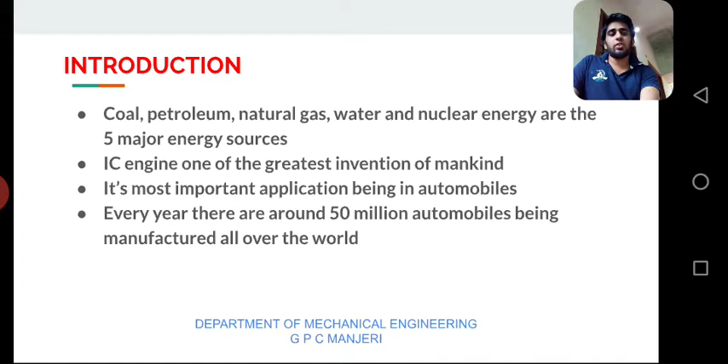With the rise in the number of automobiles is also a rise in the use of fossil fuels. That also leads to some problems. The combustion products of fossil fuels cause environmental problems like air pollution, smoke, etc. Overuse of fossil fuels also leads to an energy crisis.

There is a need of alternative source of energy. Then we discuss about alternative sources of energy.

Electricity is a versatile form of energy, but its drawback is that the storage of electricity is very difficult.

Then we think about another source of energy. We can say magnetism shows as a bright spot in our current scenario. Magnetism is a phenomenon which exists in our nature.

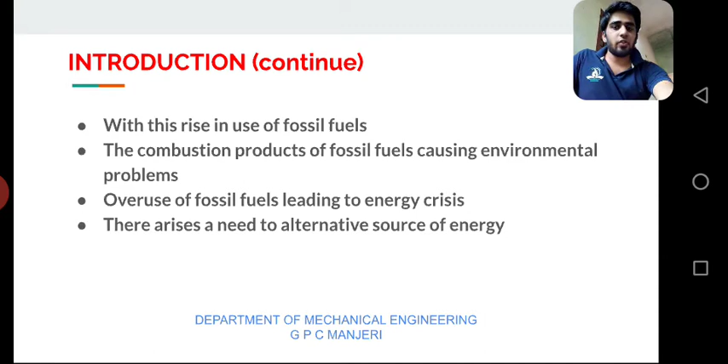Various research across the world have proved magnetic power can be used in our everyday life.

The magnetic repulsion piston engine is an alternative of IC engine. The engine works on the repulsion principle of magnet. The engine is also similar in construction to the typical IC engine.

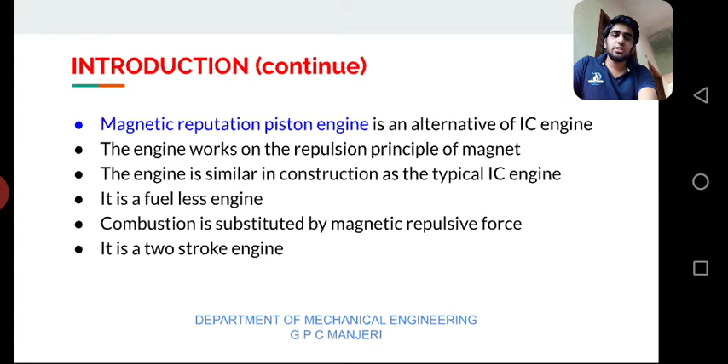It's a fuel-less engine. Combustion is substituted by magnetic repulsive force. It is a two-stroke engine.

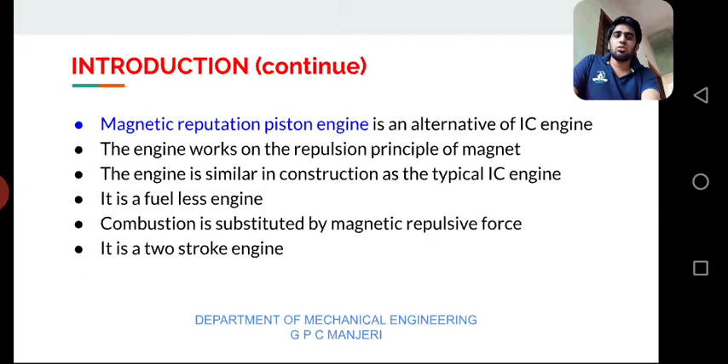Then we discuss about what is the need of this technology. We know that today fossil fuels are widely used as a source of energy in various different fields like power plants, internal and external combustion engines, as a heat source in manufacturing industry, etc.

One of the major fields which fossil fuels are used is the IC engine. Magnetic repulsion engine is an alternative of IC engine.

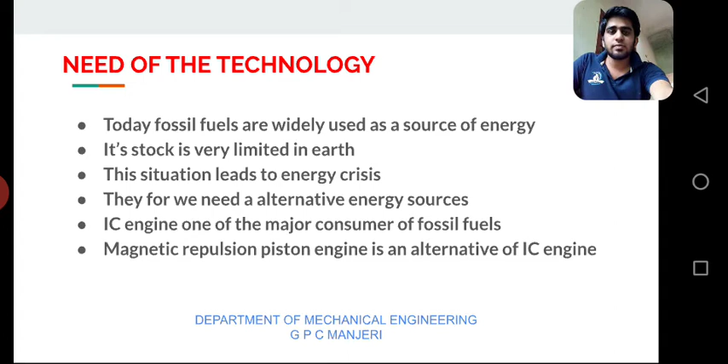Then we discuss about magnetism. Magnetism is a natural phenomenon. A magnet has two poles, north and south.

Magnets repel and attract another magnet. Like poles of magnets repel and unlike poles attract. Magnets are also classified into two: permanent magnet and electromagnet.

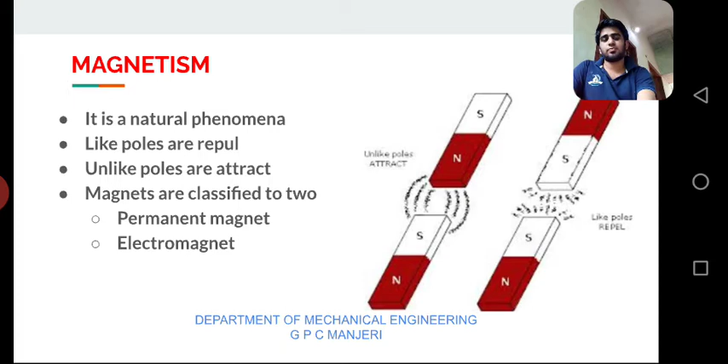Permanent magnet is the most common type of magnet known and interacted with in our daily lives. These magnets are permanent in the sense that once they have been magnetized, they retain a certain degree of magnetism. Permanent magnets are generally made of ferromagnetic materials; iron, cobalt, nickel, and its alloys are also ferromagnetic materials.

Such material consists of atoms and molecules that each have a magnetic field and position, and reinforce each other.

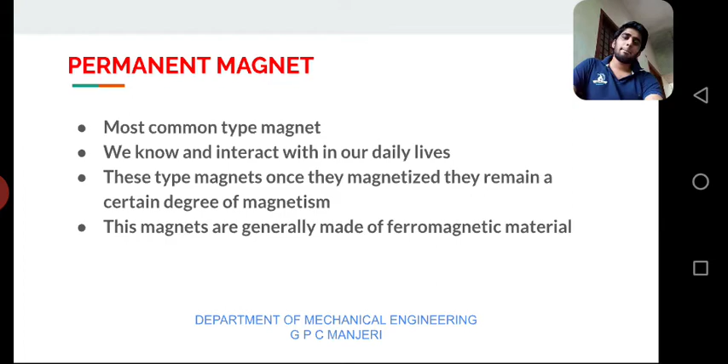Permanent magnets can be classified into four based on their composition. First, neodymium iron boron magnets, also known as NDFEB or NIB magnets. Second, samarium cobalt magnets or SMCO magnet. Third, alnico magnets, and fourth, ceramic or ferrite magnet.

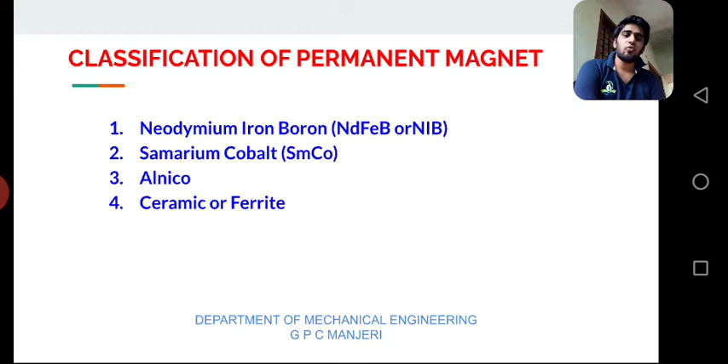Then we can discuss about neodymium iron boron (NDFEB) and SMCO magnets. This type of magnet is the strongest type of magnet, meaning they are very difficult to demagnetize, and they are also known as rare earth magnets since their compounds come from rare earth of lanthanide, the rare earth or lanthanide series of elements in the periodic table. The 1970s and 80s saw the development of these magnets.

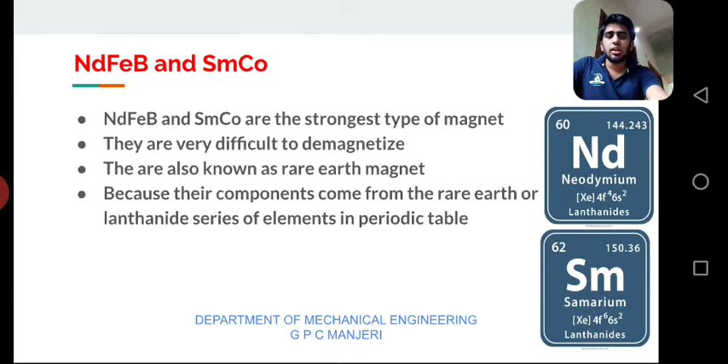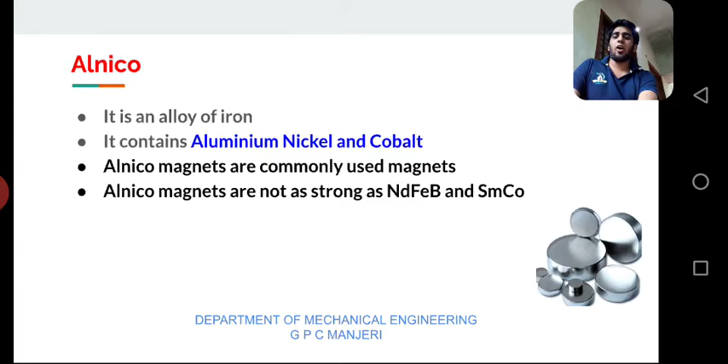Then we can discuss alnico. Alnico is the most common type of magnet. Alnico is an alloy of iron that consists of aluminum, nickel, and cobalt. Alnico magnets are not as strong as NIB and SMCO and can be easily demagnetized. The magnet is, however, least affected by temperature.

Then next, ferrite magnets. Ferrite magnets are the most popular today. They were first developed in the 1960s. These are fairly strong magnets, but their magnetic strength varies greatly with variation in temperature.

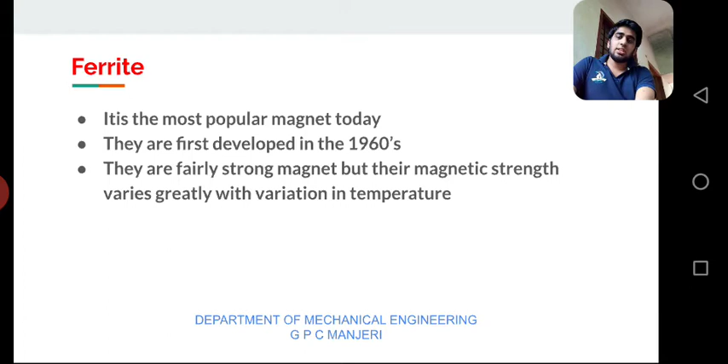Then we can discuss about electromagnet. Electromagnet is a type of magnet which possesses the ability to magnetize and demagnetize as and when required. This control is established by an electric current. When current flows, magnetism is expressed, and it vanishes when there is no flow of current because it is a temporary magnet.

When a wire is closely wound around a cylindrical object, the side faces of the core exert certain poles when current is passed. Reversal of current changes the magnetic poles across the iron core.

When electric current passes around the core, there is an energy generation called magnetic flux. This flux is responsible for exerting the magnetic force.

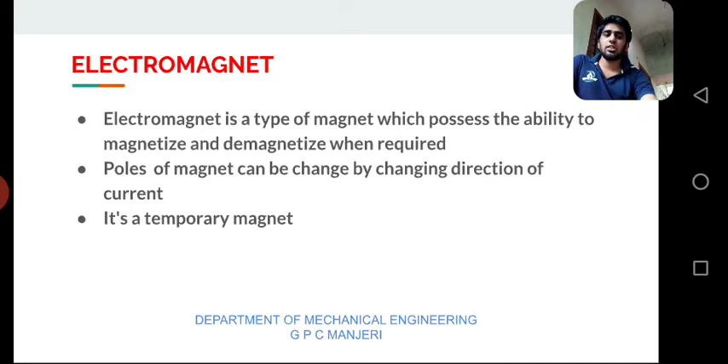Then we can discuss the construction of the magnetic repulsion piston engine. A magnetic repulsion piston engine consists of a non-magnetic cylinder, piston with connecting rod, flywheel and crankshaft, and a pair of permanent magnets.

The construction of the magnetic repulsion piston engine is similar to a typical IC engine, but the spark plug and valves at the cylinder head are replaced by a permanent magnet, and another permanent magnet is placed at the top of the piston which can freely reciprocate along the cylinder. Both magnets are arranged so that the surfaces face each other with like poles. Small openings are provided at the cylinder for air circulation.

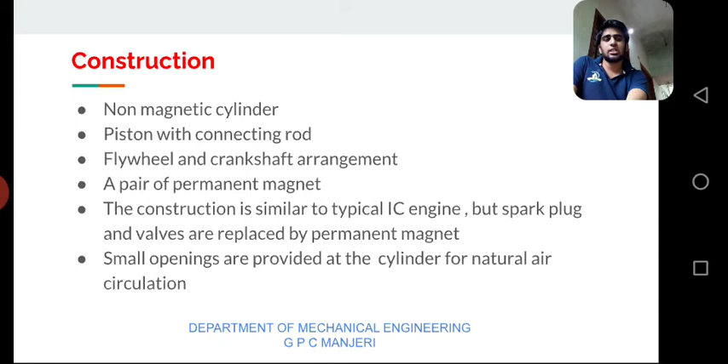Now we can see a picture of the magnetic repulsion piston engine. In this figure we can see the flywheel, permanent magnets, crankshaft, piston, connecting rod, etc.

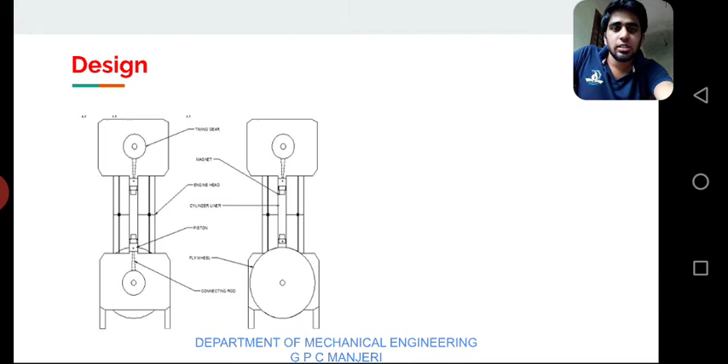Then we can discuss the working of the magnetic repulsion piston engine. As the name suggests, it works on the principle of magnetic repulsion force. When the piston is at BDC, we provide an initial crank effect, then the crankshaft rotates 180 degrees and the piston moves from BDC to TDC.

Then the magnets on the cylinder head repel the magnets on the piston, and the piston moves from TDC to BDC. The crankshaft completes its rotation. After the piston reaches BDC, the flywheel will pull the piston back to TDC and repeat the cycle.

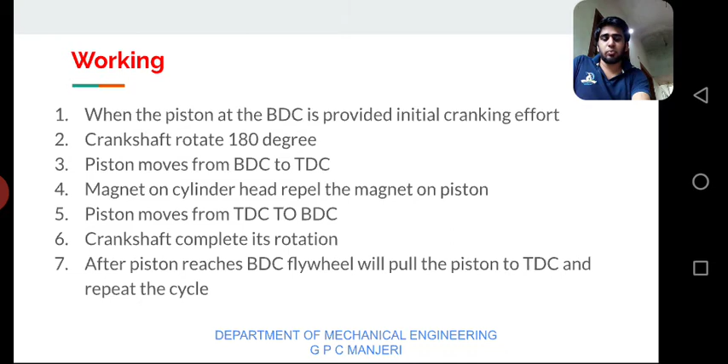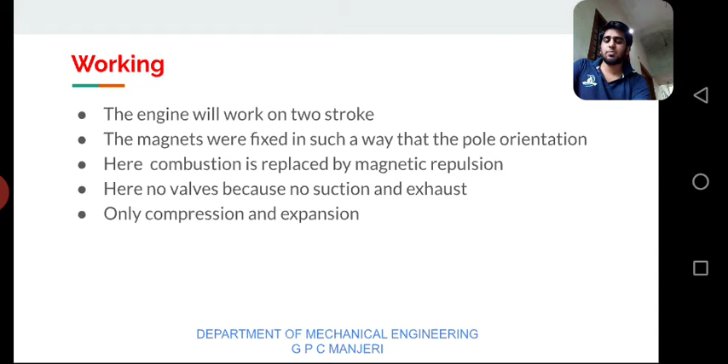The engine works on two strokes. The magnets are fixed such that their pole orientation, meaning like poles, face each other. The combustion is replaced by magnetic repulsion. There is no valve because there is no suction and exhaust. Only compression and expansion take place in the magnetic repulsion piston engine.

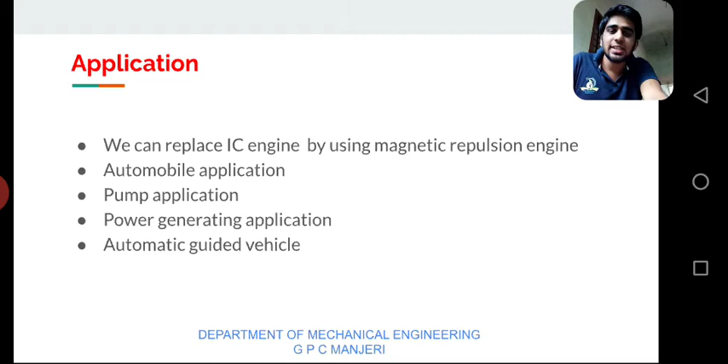Then we can discuss the application of the magnetic repulsion piston engine. It is an alternative to the IC engine, because wherever we use an IC engine, we can replace it with a magnetic repulsion piston engine. There are automobile applications, pump applications, power generation applications, automatic guided vehicles, etc.

Then we can discuss the advantages of the magnetic repulsion piston engine. First advantage: it reduces pollution from one source as opposed to millions of vehicles on the road. Transportation of fuel would not be required, as it draws power from the electric grid.

This presents significant cost benefit. Pollution created during fuel transportation would be eliminated. Then second, there is no need to build a cooling system, fuel tank, ignition system or silencer, etc., because it has no use of fuels, no exhaust gases, etc.

The mechanical design of the engine is very simple. It has lower manufacturing and maintenance costs, as well as easy maintenance. Consumption of fossil fuels is reduced.

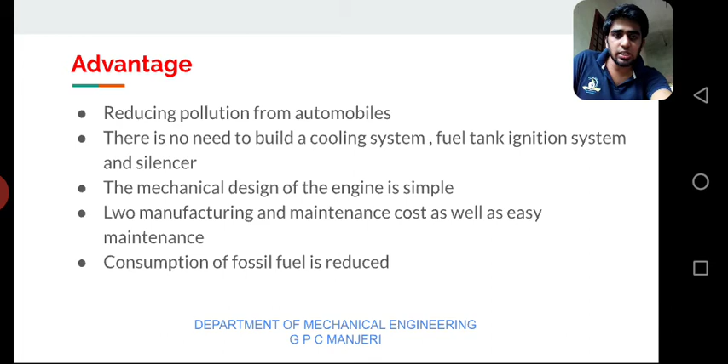Consumption of fossil fuels is reduced. An initial crank effect is enough to start the engine. The lifetime of the magnet is long, so it can run for a long period.

No combustion takes place inside the engine, which reduces the evolution of heat and toxic gases from the engine, reducing global warming. It is an environmentally friendly engine.

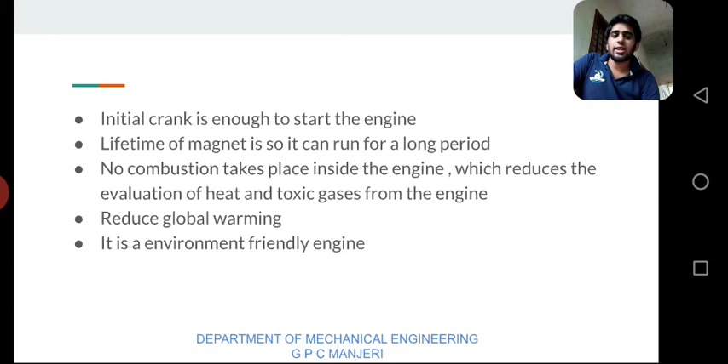Then we can compare the magnetic piston engine and the internal combustion engine. The design of the magnetic repulsion piston engine is simple with respect to the IC engine, because it does not have complicated structures like valves, spark plugs, fuel injection, etc.

It does not use fossil fuels since it has no fuel tank and pumping system. It does not have a cooling system. Combustion in an IC engine is replaced by magnetic repulsion force. It does not have an exhaust line, therefore it does not produce any type of air pollution, because it is an eco-friendly engine.

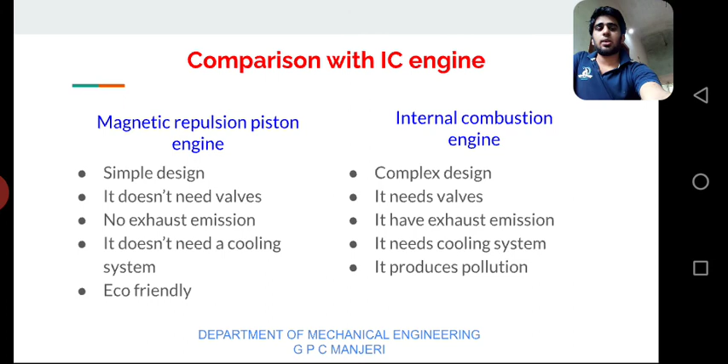An important note: the force of attraction or repulsion between two magnets is F equals m1 times m2 divided by mu r squared, where F is the attraction or repulsion force in Newtons, m1 and m2 are the magnetic strengths in Weber, r is the distance between the two magnets in meters, and mu is the permeability in tesla meter per ampere.

That means when the magnets are closer, the repulsion force is maximum. When the magnets are far apart, the repulsion force between them is minimum.

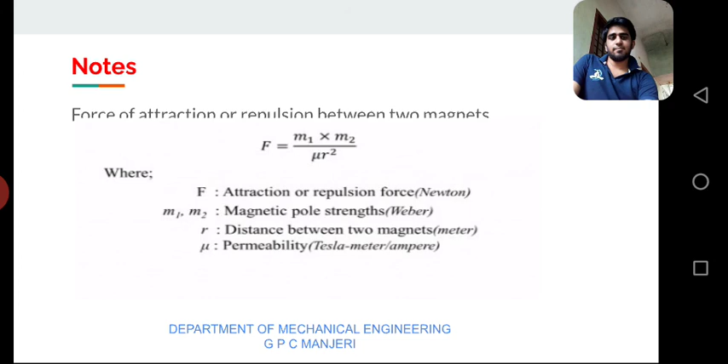Then we can conclude the magnetic repulsion engine is a good alternative to the IC engine. It is a fuelless engine, it works on magnetic repulsive force, and it is a two-stroke engine.

Then we discuss magnets and magnetism. Magnets are of two types: permanent magnets and electromagnets. Permanent magnets are classified into four types: neodymium iron boron, samarium cobalt, alnico, and ferrite, etc.

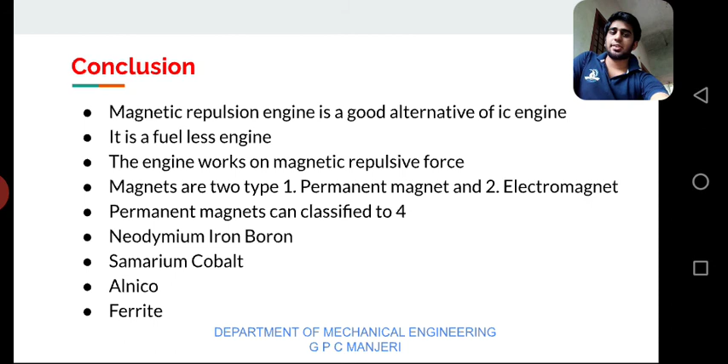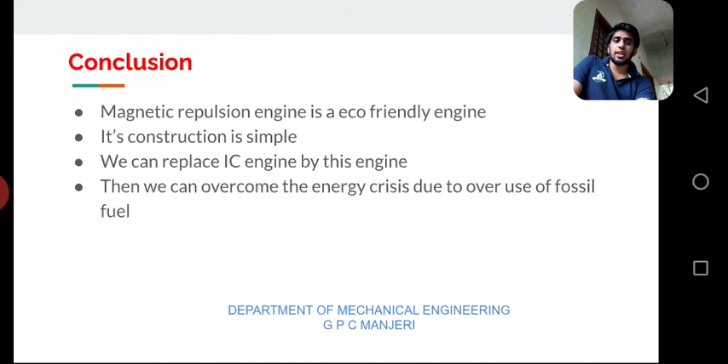The magnetic repulsion engine is an eco-friendly engine. Its construction is simple. We can replace an IC engine with this engine, and we can overcome the energy crisis due to overuse of fossil fuels.